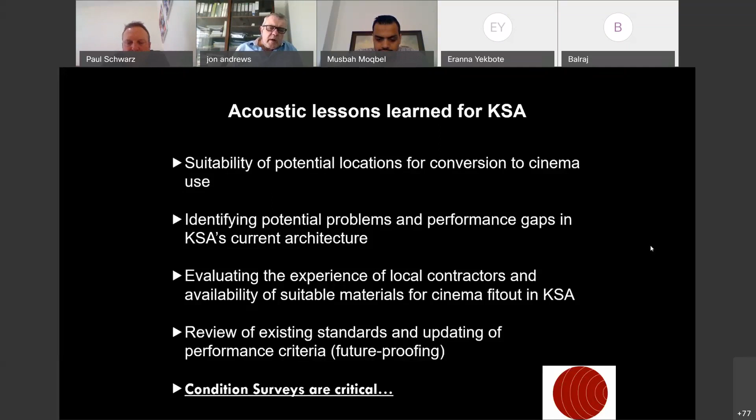Understood. Okay, well, let's jump straight into the regulatory environment, and then we can talk about design standards, and then move into specific items on the design in terms of risk and reward, problems and solutions. So, as everybody knows, at the moment Saudi Arabia has effectively developed their regulations around the International Building Code and the Saudi Building Code. They actually have their own regulatory environmental framework and construction standards, which, similar to the UAE, are based quite loosely on the British standards, but not in every respect.

Cinemas, for example, and public performance spaces don't really have a specific mention, apart from some cursory mention of demising walls and external walls. They don't really go into a lot of detail about performance spaces and what is required in order to achieve specific standards, unlike BS 8233 in the UK or certain European or Australian standards. So really it's left for the developers and the operators to develop their own standards, or the individual consultants to be putting forward what they believe to be the case. And this is one of the main reasons why, across maybe 4 or 5 different operators, or indeed 11 operators as we seem to have now in Saudi Arabia, you're going to have a multitude of different standards being adopted. It's really down to individual interpretation.

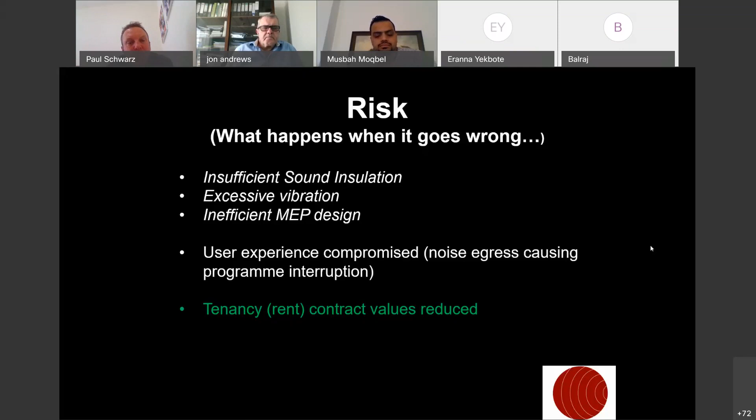Sound could be heard between the adjacent auditoria. The cinema operator went back to the mall operator and said, well, we can't use 100% of our auditoria. We're not going to pay you 100% of the tenancy contract. We're going to pay you 60 or 70%. Now, as you can imagine, that was a huge reduction in the contract value.

And the next time that mall owner and the operator both joined forces to develop a new cinema, they made it very, very clear that that problem would never be experienced again, or anybody working on that project would simply not be involved with either the operator or the mall owner in any capacity ever again. And so that made people very much focus and concentrate on what was going to be done.

We looked at the design standards and we made sure that they were not going to have a repeat of that problem. They came to the company that I was working for at the time to ensure that that never happened again. It was initially due to a problem to do with coordination.

The design was done outside of Dubai and was perfectly good design, but when it came to Dubai, unfortunately, there's some value engineering that took place, and the value engineering happened, as is often the case, without the relevant parties being able to say, no, hang on a minute, you can't do that. That's going to have a pretty significant negative impact on this. So that coordination, and I'll come back to coordination a little bit later in the talk, is absolutely critical.

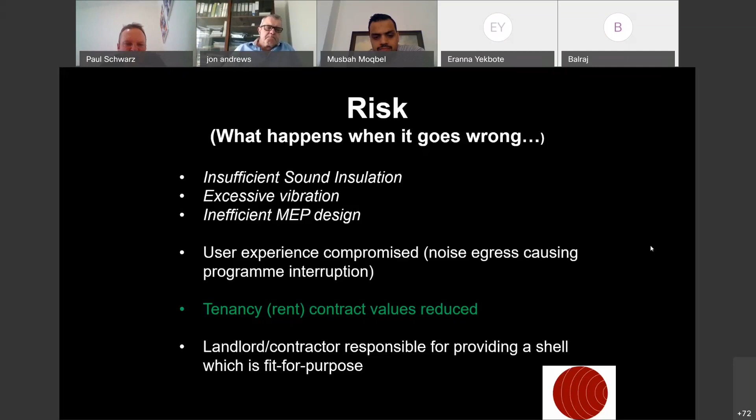Yeah. And funny enough, my last point there is exactly right. It's about providing a shell which is fit for purpose, which is obviously between you guys and the contractor a critical issue. So in terms of mitigating these risks, obviously feasibility studies need to be done as comprehensively as possible, as early as possible, to ensure that for the locations and the shells that are not designed for cinema fit out, we understand exactly what needs to be done to bring them up to spec, up to scratch. We do a gap analysis, so that everybody knows exactly what they're getting to start with, so there are no question marks.

Construction budgets don't balloon out of control, and really that's all about having the right amount of information as early as possible in the project. Provision of utilities, incoming electrical supplies, access for deliveries for food and beverage, everything like this. Building services, existing building services, a big issue that we found in Saudi Arabia.

Very often we're taking over spaces where other tenants are going to have their building services very close to the cinema demise, which, as any MEP contractor, and of course you guys know at Boral, we can't have building services very close to the cinema demise on the roof or adjacent horizontally, because any transfer of noise and vibration energy into the cinema demise could potentially cause a big problem.

So identifying those building services, identifying the ones that need to be moved, and informing the landlord that the moving of those critical items needs to happen at a very early stage, because that also needs to be programmed into the construction schedule, and it's no good finding out about that kind of thing at the last minute. Again, costs go up and programs start to get pushed out.

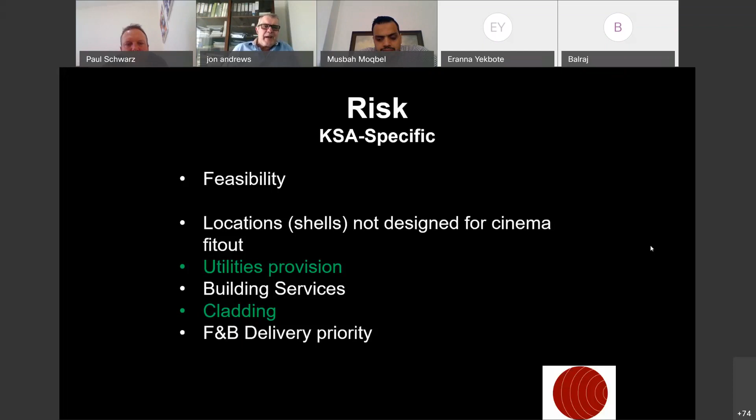can result, because in effect, and we'll probably come to this later on, the wider the wall or the bigger the airspace that we can provide away from a noise source, the better the acoustic reduction. So sometimes we have to have huge airspaces to produce the noise reduction that's required.

Yeah, completely agree, and we'll get into the specifics of the coordination of exactly that, the floor space. With mass barrier ceilings, a critical element is ensuring that the mechanical services supply and return routes can be provided without being compromised. It's a constant battle between the MEP consultant, the MEP designer, and the supplier of that mass barrier ceiling, to make sure you aren't compromising each other's elements, but with proper coordination it can happen, and it's been shown to happen many times.

So it doesn't need to be a problem. It's really only a problem when we're dealing with teams that have got not a lot of experience in dealing with it, really.

So what can happen when things go right? Well, the user experience is enhanced. The operator gets repeat customers, and they get lifetime users. Not only lifetime users, but generational users. Parents bring their children, those children grow up, and they then bring their children to the cinema, and it becomes a generational repetition of a customer base.

And word of mouth marketing, it speaks for itself. Obviously everybody that goes to the cinema and has a fantastic experience, one of the first things they'll do is tell everybody about it. And if they have a great food and beverage experience, a great customer service experience, if they have experienced the quality of a building and a very comfortable seat that's nice and quiet, and they weren't interrupted throughout the process, then yes, again, they tend to tell a lot of people about it.

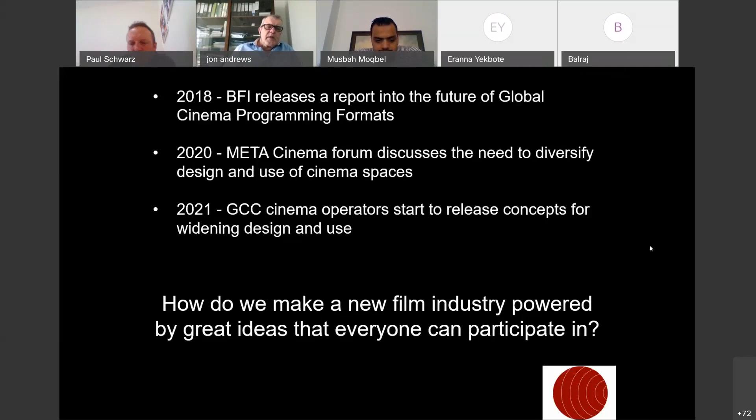So we've actually developed a system now that is both absorbent and acoustic at the same time, so that we're, one, reducing the amount of space that we're taking out of the box with the ceiling acoustic isolation, but two, we're reducing the weight tremendously at the same time. But that's a specific product that we developed and passed through to yourself.

We're also going into some very, very specialized ceiling solutions and wall cladding solutions now, so that we can offer the products and the solution to make these spaces that need to be more versatile and more interactive, double use and treble use, more fit for that use, so that there is a different impression when you go forward into the cinema.

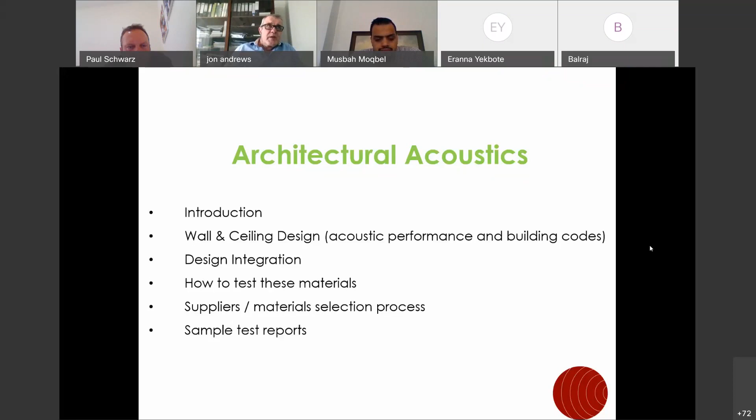And this is something that we are highly focused on: which way are the architects looking, how are the new spaces and interactions and types of use for the building being created, and what can we as a manufacturer put forward or develop to meet those goals outside of the traditional gypsum partition and gypsum ceiling. We are now looking at lots of other ways of basically enhancing and making spaces act as a double space or treble space.

Yeah, exactly right. And to that end, it's obviously a critical issue for the designers to ensure that the various members of the team, in terms of design, construction, and suppliers, are all on the same page.

But that level of coordination and having the experience of a team like yourself and experience within the design team is absolutely critical, because we will get issues, for example, as I mentioned earlier, where we've got building services units that might be very, very close to the auditoria itself, which, okay, if they can't be moved, as you mentioned, John, there is always a solution.

However, what we want to try and do is absolutely minimize the issues as early on in the project as humanly possible. If it's possible to move equipment, then that's great. But if it can't be moved, then there are certainly suppliers and contractors out there that can help to isolate this equipment. But it's that old adage that you can't solve a problem that you don't know exists. And so identifying these as early as possible is absolutely key. From my point of view...

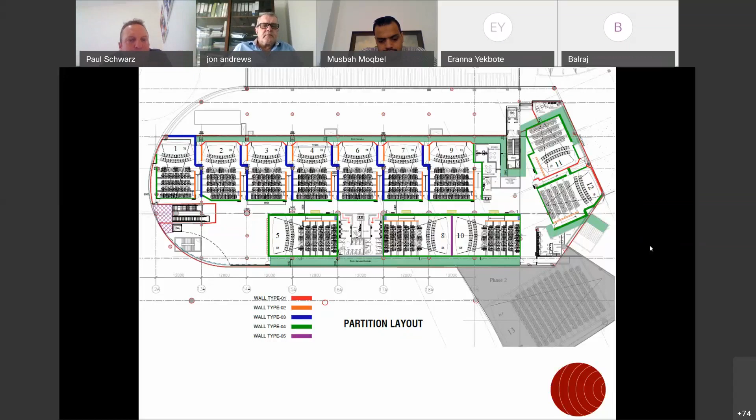And yes, exactly, coordination like that needs to take place to prevent issues. Well, I was about to say it doesn't usually happen that wall widths get reduced, but of course it does, because very often the architectural interior design team can be under a little bit of pressure to increase the floor space in order to increase the number of seats within an auditoria. So we do actually get requests about reducing wall widths. But yes, you're absolutely right. Our preference is to increase them, not reduce them. But of course, there's always a price trade-off against that.

Okay, so very quickly, acoustic design and why is it important? Well, acoustics and sound affect everybody in a number of different ways. And the human auditory system is quite remarkable in terms of its complexity and its sensitivity. And acoustics is important to, I guess, a lot of people who are joining this webinar simply because acoustics is important to their clients. And acoustics is one of those rare, well, not that rare, I guess. Everybody in the design world thinks that when you do something right, you're not really recognized for it.

But my goodness, when it goes wrong, it's one of the first things that gets picked up on, and probably no more so than noise and acoustics. Invariably, if you're in an auditorium, you have a perfectly good experience, and you're watching a great film, you're not really thinking about the acoustics. But if you can hear noise coming in from outside, or you can hear somebody talking on their phone within the auditorium, it's obviously one of the first things that you notice.

And this is important, not only from a customer point of view, but there are some very important financial implications of not getting the acoustics right. These are the environments in which we live and work and operate. Just stepping outside of cinemas for a brief second, studies have shown that when people are in work or professional environments that are not conducive to the kind of work they're expecting, that can result in up to a 2/3 productivity reduction. If you were to tell anybody that owns or runs a company that their workforce is potentially 2/3 less productive than they could be, I suspect that's going to raise a few eyebrows.

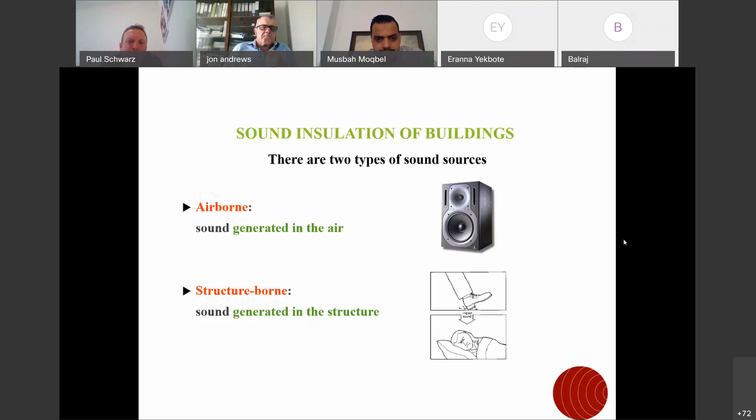Sound insulation testing and acoustic engineering tells us exactly what is happening below the surface, and a very effective way, as I say, to report on the quality of a build without being able to necessarily see exactly what's going on.

The design standards and targets that we use, and I mentioned THX and BS8233 early on, these are kind of the mid-range, the fairly typical numbers, the typical design standards that we might see in a space. And one of the important things here is the first two lines, external music and all sources other than music in terms of noise break into an auditoria. NC25 as a criteria is actually a very, very low noise level to achieve.

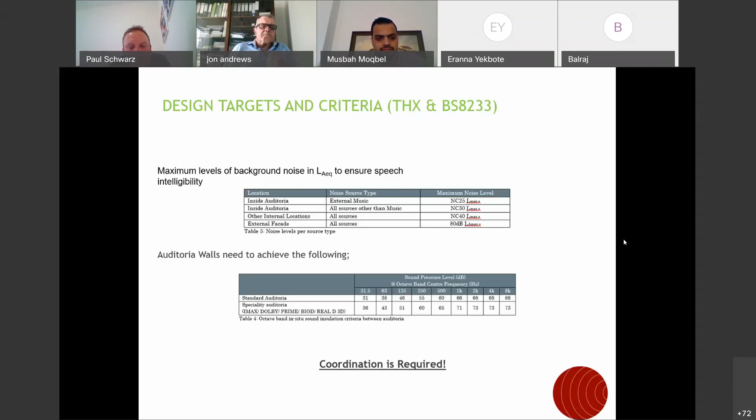If you think, only 5 dB below that is generally considered the threshold of human hearing. And that would be for a very young child or somebody with almost completely unaffected hearing. So NC20 being maybe a broadcast studio or a recording studio, the very next most difficult space to achieve that criteria is a cinema, and that's typically around about NC or NR25 in old money, as it were.

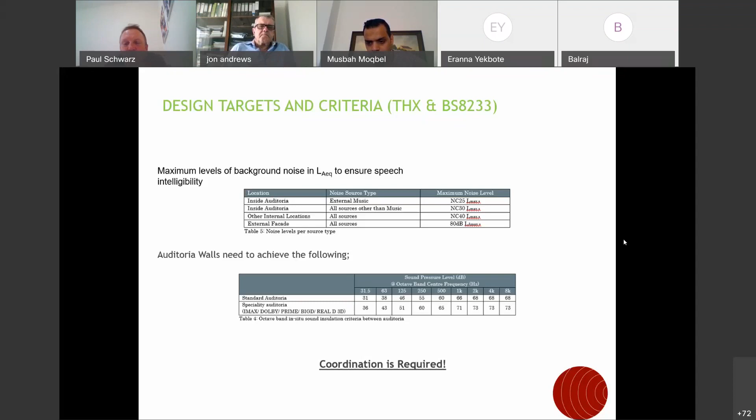Now, if you think about that, that is noise being stopped from coming into an auditorium that might be created by the next door cinema or the auditorium next door. But there are also instances where we might have noise breaking from other structures or other uses in and around the development. And something that we need to be very cognizant of,

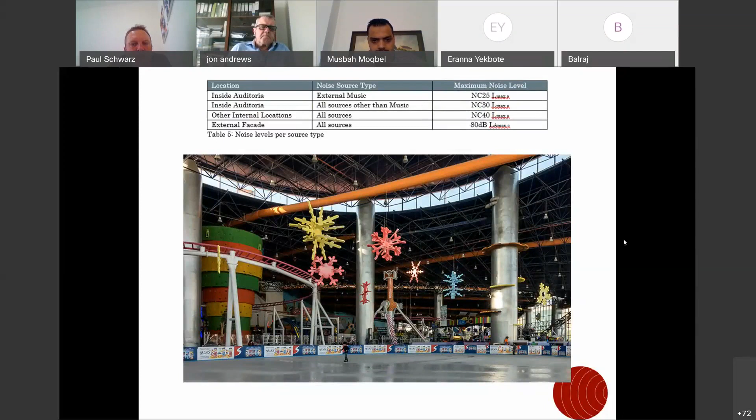that is a picture from an existing mall in Saudi Arabia, and something that is quite common in family entertainment zones, family entertainment spaces, which are very often very close to where the cinemas might be: they have indoor roller coasters, they have indoor fun fairs, these rides, which were designed and built up to 15 to 20 years ago. Now,

vibration isolation of these particular structures from the supporting slab is virtually non-existent. I haven't actually ever seen any indoor theme parks so far anywhere in the GCC that have been completely and adequately vibration isolated. Now, what does this mean?

Unfortunately, if that vibration gets into the structure, and certainly during public holidays or when these spaces start to be used quite considerably, there is the danger that this noise and vibration could easily break into the cinema space. And then that goes back to my earlier comment about interrupting the cinema-going experience.

And if that noise and vibration is experienced by a user and it's not related to the film, that can disrupt their movie-going experience and be quite frustrating and annoying sometimes. So that means two things have got to happen. The incoming cinema operator has got to make the decision to completely vibrationally float or isolate the cinema space, the entire cinema space. And that obviously has knock-on effects for you and your team, as I'm sure you'll comment on in a second, John.

Or they need to go back to the operator of that roller coaster or the indoor family entertainment space and say, look, Mr. Operator, you need to isolate all of your equipment from the structure. Otherwise, my incoming cinema operator is going to have a big problem. So either way, there's going to be a costly and expensive solution that needs to be applied here. But it needs to be thought about at a very early stage, because vibration getting into your walls, John, can be quite a significant issue sometimes.

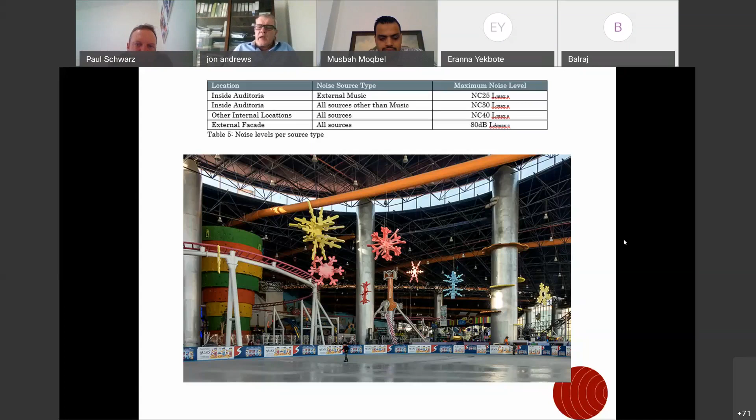Yeah, it can be a major issue. We're actually working closely with manufacturers in the region and identifying and understanding how we can actually isolate our partitions from the structure. And that is something that we now provide as a solution. So, again, going back to our earlier discussions, as long as we're aware at an early stage of these issues, we can make sure that that is incorporated in our detailing and design that we submit for the cinema.

Absolutely. And in the same respect, us as the consultants should also be assessing the material submittals that come back from people like yourself and ensure that they meet the selected criteria. And I have to say, we're obviously very aware that you guys have got a considerable amount of experience of submitting exactly the right documents that are required to support the material submittals. So we're obviously very grateful for the evidence that you guys provide. Makes our jobs a hell of a lot easier when we're having to do the demonstration of compliance and our gap analysis, an example of which you can now see on the screen.

So we will essentially look at every element that could possibly affect the acoustics and ensure that with our calculations and models that what is being provided and what is being proposed actually is fit for purpose. And then invariably what should happen is that the consultant comes back with that gap analysis and a compliance statement as to whether everything has been provided that is required or not.

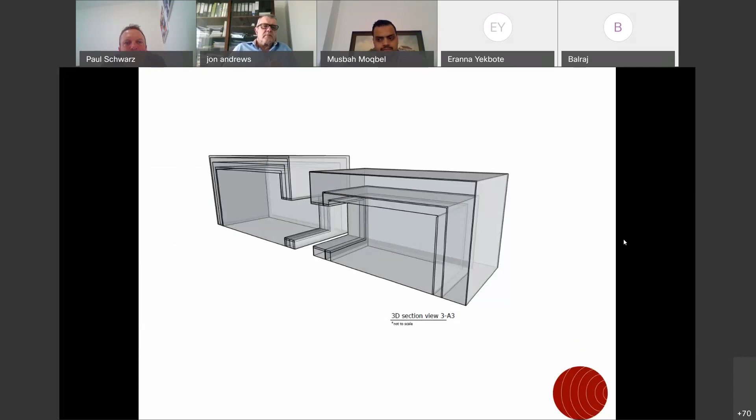And then that supplier and material selection process comes back to us, which, as you know, can be satisfied one of a number of different ways, but ideally we will see a laboratory test report certificate from an accredited facility, or a material data sheet, telling us exactly what it is that your systems can achieve. And occasionally there are some situations that cannot be evidenced by testing in a laboratory, in which case site testing data showing that the system has been capable of achieving that in the past in a different location is also asked for as supplementary evidence.

But obviously, as you know, that site test data is really only specific for that particular site. It's very often not transferable. However, out of all of the transferable data, it's often the case that a cinema shell is sometimes built out of only that particular product. So, for example, we might have a cinema shell that is entirely built from a wall type 1, in which case that result is not really going to differ from site to site.

Because obviously, as you know, the difference between laboratory and site is the quality of the other elements of the construction, the supporting slab. There may be other elements, MEP services, penetrations that cause a weakness. But obviously, if they don't exist, then it might very well be that a site test report might be considered to be a supplementary. But you guys have got quite a comprehensive amount of site testing data, as you imagine, because you mentioned you've got nearly 45 sites that you've completed.

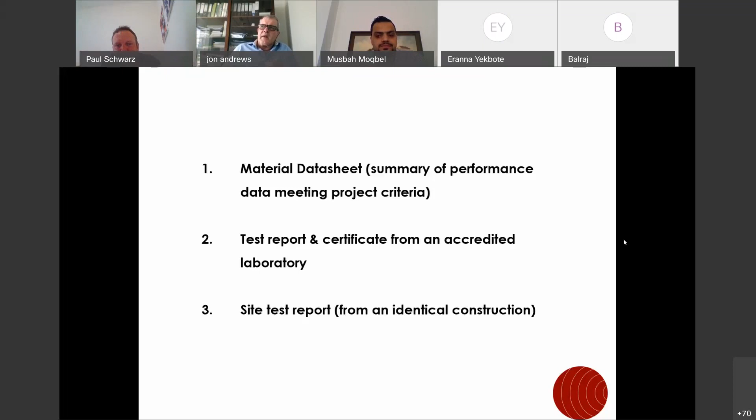Yes, and it's through those that attention to detailing is absolutely vital. Rather than just being a wall type 1 or wall type 2, it's actually the detailing at the head and the interfaces, and to ensure that that is done correctly, which is why we attend most sites on a regular basis to actually inspect and sign off that the detailing and the standard of workmanship is correct. And then we are confident that when you come to test on site we will pass. And as I mentioned earlier, we've passed every single cinema that we've done or exceeded the requirements.

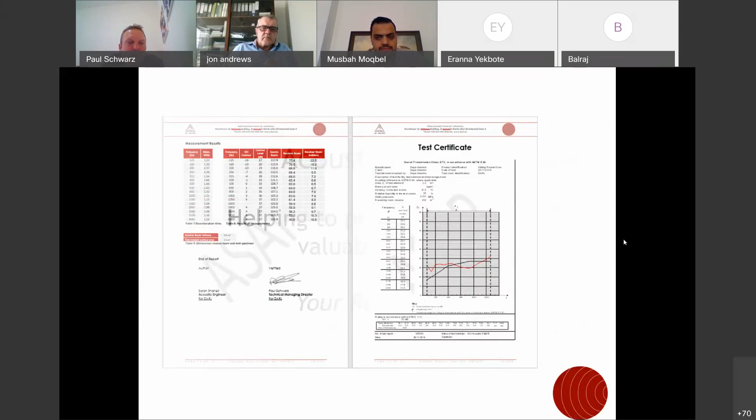And really, just in summary, then, to basically everything that we've talked about. The acoustic design, the attention to detail that the contractor plays, the quality of the materials and the quality of the systems that are provided by the supplier. At the end of the day, it's helping the industry to protect their most valuable asset, and that is the reputation of those in the industry, the reputation of the operator, and the reputation of those who are providing the professional solutions.

And that is really what acoustic design is all about, because at the end of the day, let's face it, we're not really out there to make things look pretty. It's 99.9% about performance, repeatable performance, and provable, reliable performance. And that is absolutely key, as you can imagine, for cinemas and public performance spaces.